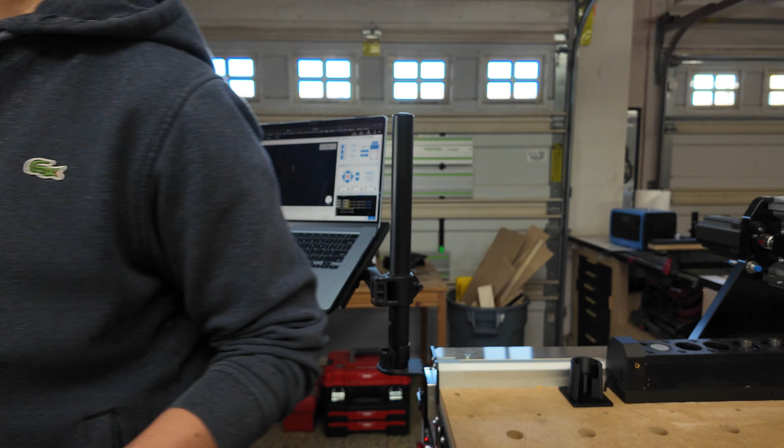Hello guys, today I'm gonna show you how I'm planning to use this 3D probe with the ATC. This will be still manually loaded to the spindle, and I put a 3.5 millimeter headphone jack here.

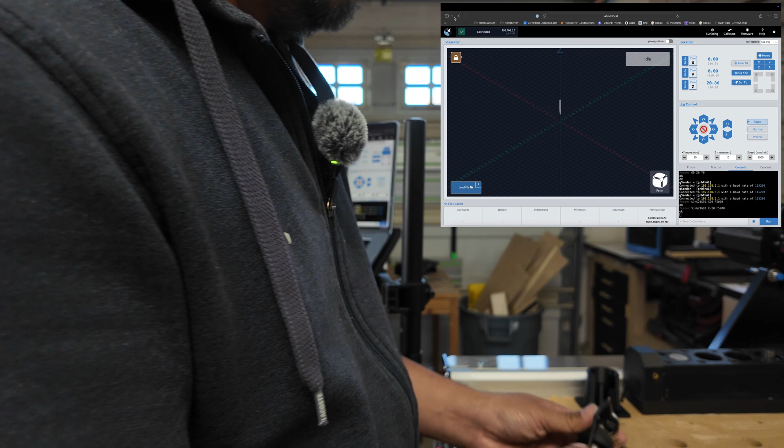That signal is parallelly connected to the TLS and also has a 5 volts and ground. So if I connect this, you can see there's a green light powered. Let me see that. There you go.

And then if we touch this, it's turning red. And you can also see, if you go to the calibrate, you can also see the probe is triggered.

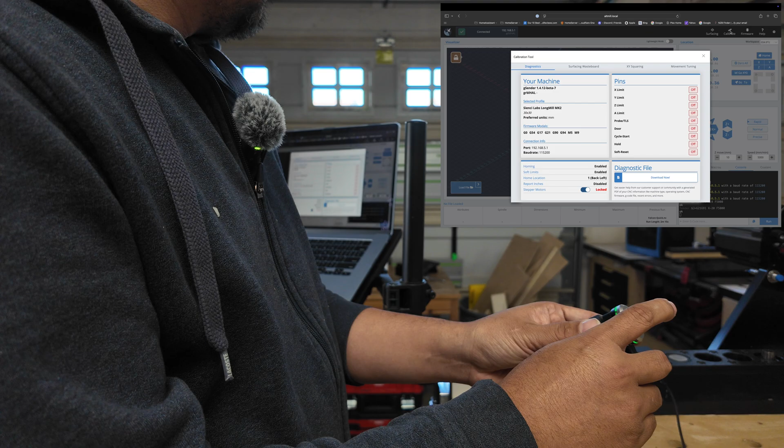So to use this is what I'm planning to do. For example, there's a tool loaded right now. Let me adjust the camera and go to the spindle. There you go. So right now there's a tool loaded on the spindle. On my magazine, I think it's tool 1. So I'm gonna unload it.

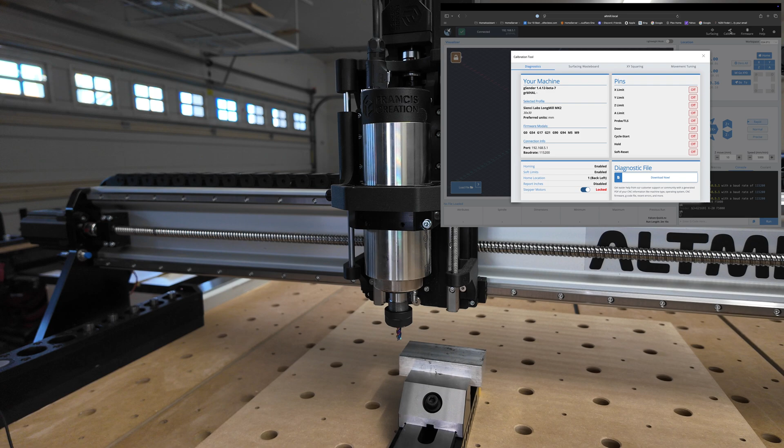Or I can also switch to the 3D probe as a tool. I assign this to number 10. Actually, any number that's outside your magazine. My magazine is 8, actually it's only 7 because I sacrificed 1 to be a TLS, tool length setter. So I only have 7 magazine slots. So if I assign this to 8, 9, this will work.

So if I go in here, either I unload or I swap to tool number 8. Let's do that. M6T8. Well, let's just do 10. Make sure. So it should unload, and then the macro on the ATC, since you enter a tool that's outside your magazine, it will just park somewhere here for you to load it manually. That's what we're gonna do. Okay, M6T10.

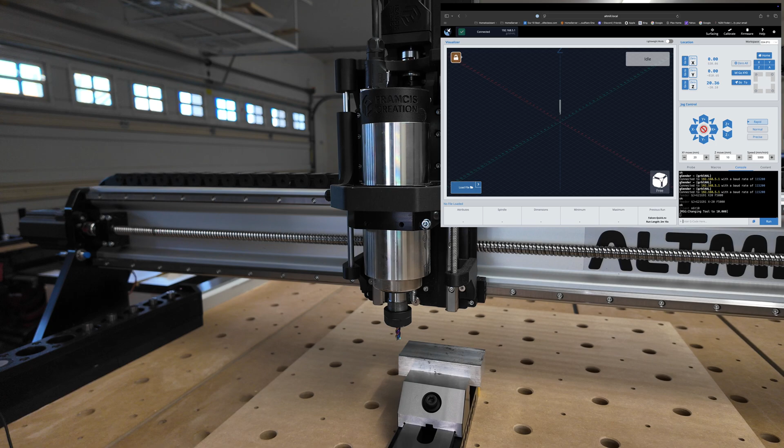And then you can also see the light, it's turned yellow because it's on hold. Now what we can do here from here is we can just manually tighten it by hand.

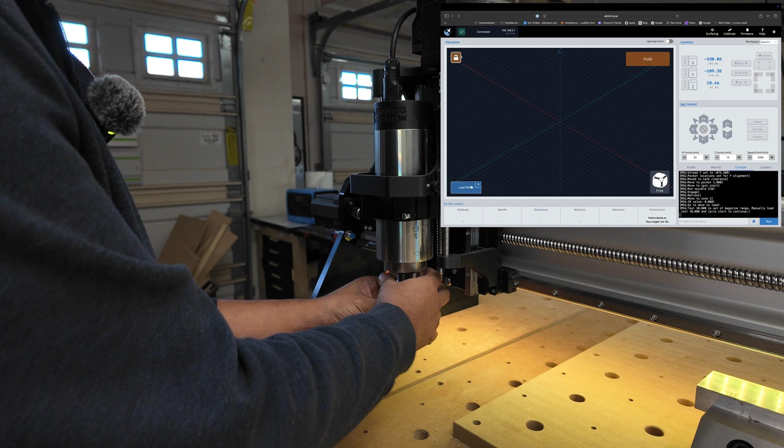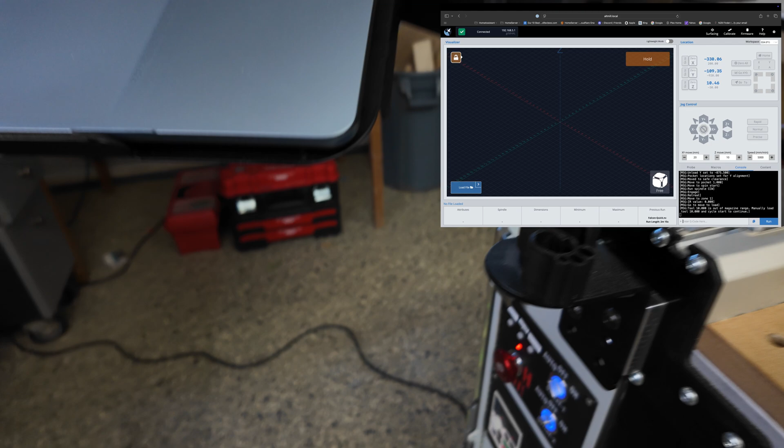There you go. And then let me see if I can show you, give me a second, because on the screen on the gSender it doesn't show you the resume button, but we can use the resume button on the e-stop. I believe it's in this. I don't know what number that is because I already created custom. So I'm just gonna click resume.

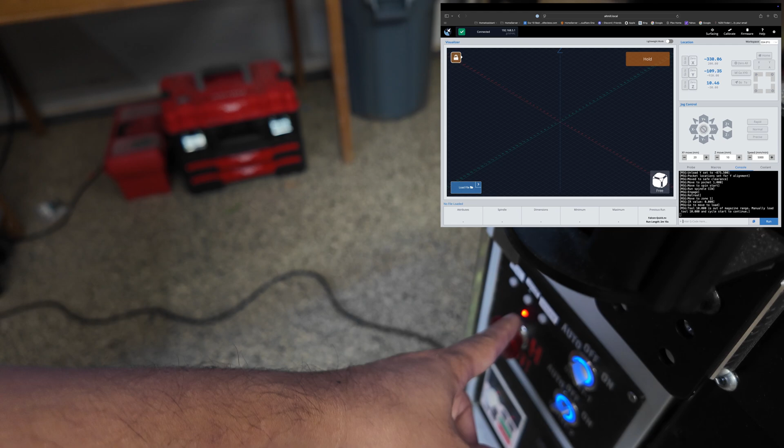And then it will measure. There you go. And then let me put this camera back on. And then let's move this to the material that we wanna measure. That's like what I like about the coil, it's very compact, and then, oops, too much.

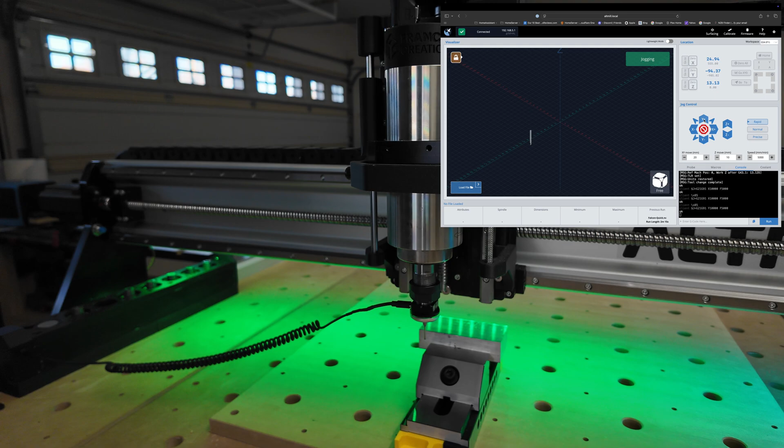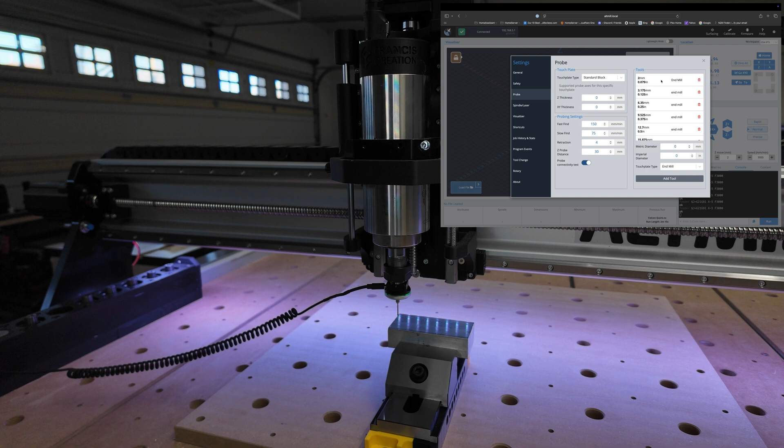Okay, that should be good enough. And then if I go to the settings, I adjusted the settings. On the probe, I'm still using the standard block, but I set the Z thickness and XY thickness to 0. And then I also add end mill of 2 millimeter in diameter, because that's the diameter of the tip of the needle of this 3D probe.

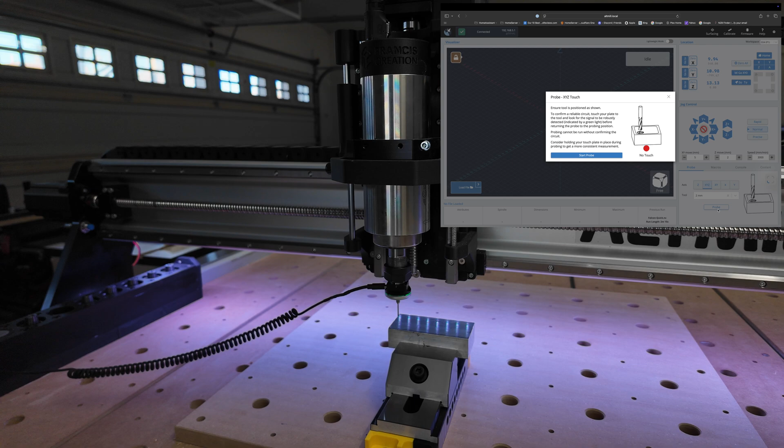So now we can go to probe. We'll select X, Y, and Z, and then 2 millimeter. So, and if I click this, waiting for probe to circuit confirmation because we turned that on. So you just need to touch this, bend it a little bit. There you go. And then we can click start.

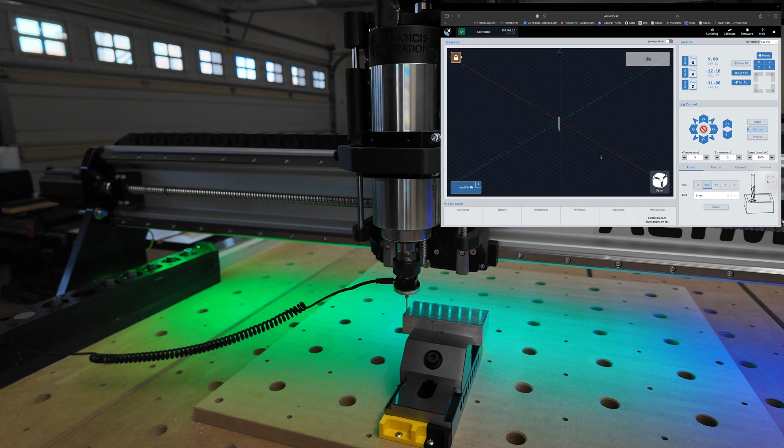Now going to Y. There you go. If I click the go to 0, Z, it should be perfectly on the corner there. Let's move up. And now, once we're done, we can start.

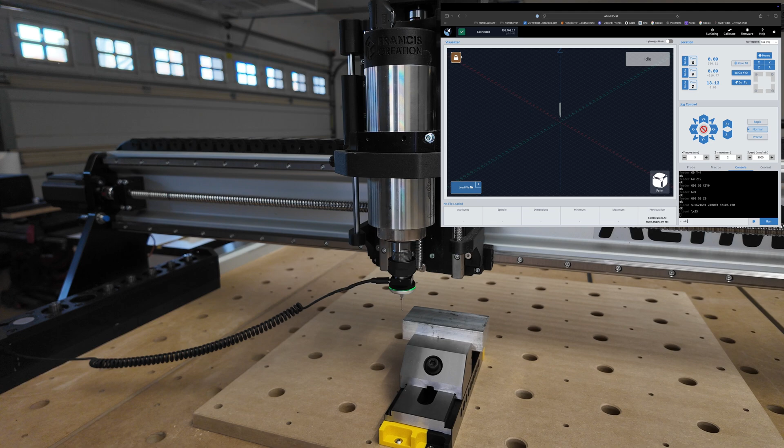Let's say I want to switch to the current tool. So all we need to do is type M6, which is G code for changing a tool, and then tool number T number 1.

And then enter. So what it should do is, since this is a tool outside the pocket, it will do the reverse thing. It will go somewhere, the coordinate where I set it up, that it goes to the parking mode, and you can do the manual unloading. Let's do it.

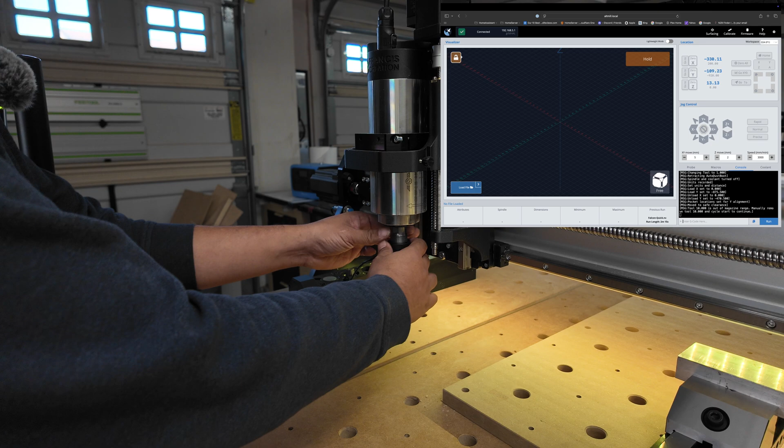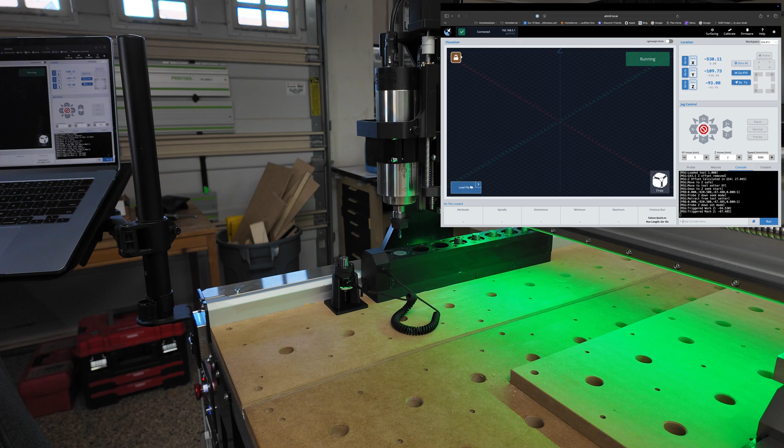There you go. So now, and again, it's turned yellow. I'm just gonna untighten it manually, store it here, and then again, I'm gonna press the resume button. Loaded, and then it's gonna do a TLS, and that's it. So we can double check.

Let's click XY0, go to XY0, and then I don't want to go blindly click the go to Z. Go to manually do the Z. So there's still 4.44 remaining, which is eyeballing it. It looks like it's 4.44. So I can click the go to 0. There you go. So it's just barely touching it, which is good enough.

So there's like a tiny, maybe 0.05 millimeter from the surface of the material.